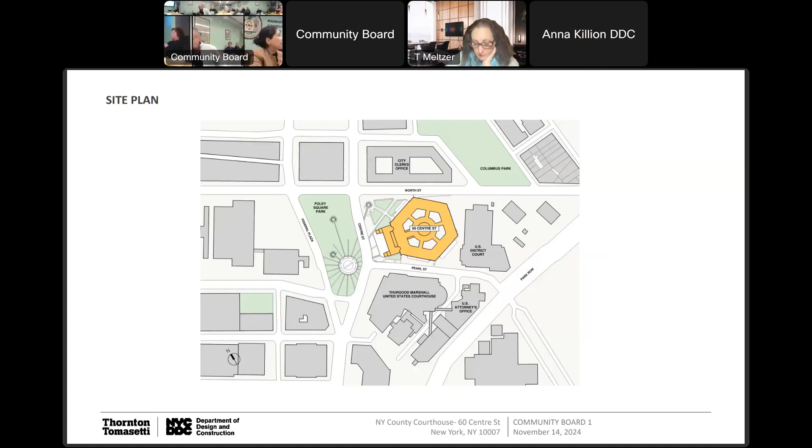So 60 Centre is located in Lower Manhattan between Pearl Street and Worth Street, right across Foley Square. It hosts the New York State Supreme Court and County Clerk's office. It is the courthouse, and the site is part of the 1997 Foley Square reconstruction, which includes the solar ray pavement emanating from the plaza into the sidewalks, including 60 Centre. You can see in green the rays that emanate toward 60 Centre. The design also includes bronze medallions. The 60 Centre property actually has 4 of these rays and one of the bronze medallions.

Next. So here you have the existing site plan, and this project is a little different because it will be reviewed by multiple parties. The majority of the scope of work falls under Landmarks Preservation Commission, because the site is historic, as well as the building, so anything within the property line is under their jurisdiction. Outside the property line, because you have artwork, the solar rays and the medallion, that falls under PDC, the Public Design Commission jurisdiction. You also have New York Parks because of the northeast corner of the property overseen by them, so we had them review and have comments, which are reflected in this submission.

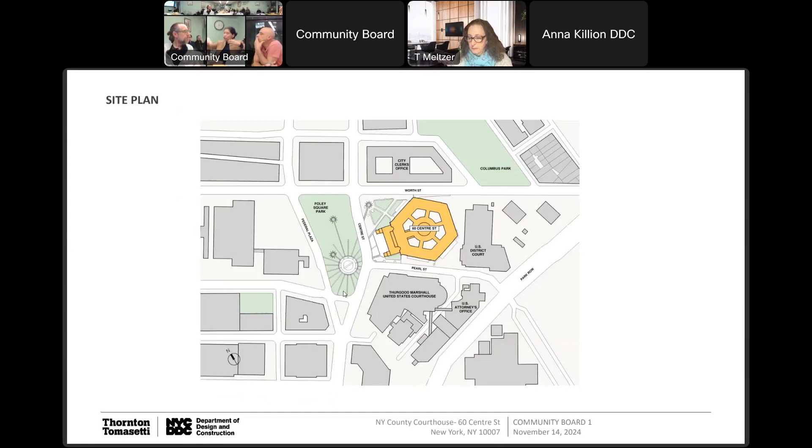What part of this site is historic? Going back here, if you go to slide 2- Foley Square was redesigned back in 1997, and you do have these rays that emanate from the sculpture of Foley Square. They actually reach multiple sidewalks across the site. So that's considered artwork, and because it's artwork, it falls under PDC jurisdiction.

Also, because it's on the public right of way, the sidewalk, therefore everything has to be reviewed by PDC and also the community, because it cannot be changed. Or if there are changes, which I'm proposing a slight change, it has to be reviewed.

Okay, so going back to the project: the project is focusing on a complete envelope rehabilitation of 60 Centre to address causes of water infiltration, drainage, and overall deterioration of facades.

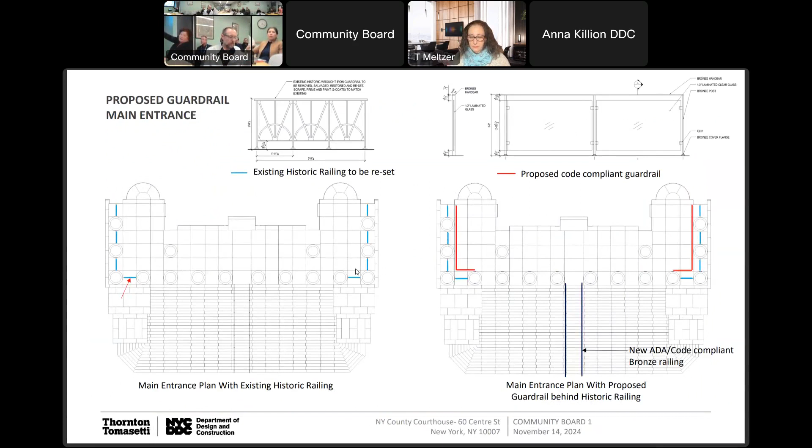The existing is just aluminum on this side. The bottom part is actually the main plan, it's steel pipe railing. The bottom part on both sides fell apart. The top is aluminum.

This is an existing photo. Yes, the left one is actually superimposing our guardrail. It's not going to be much higher. In the middle it's also trying to show there is a guardrail there, from far away, and then we also did a mock-up with the red PVC pipe. That is minimally visible, but it is visible, it blends in.

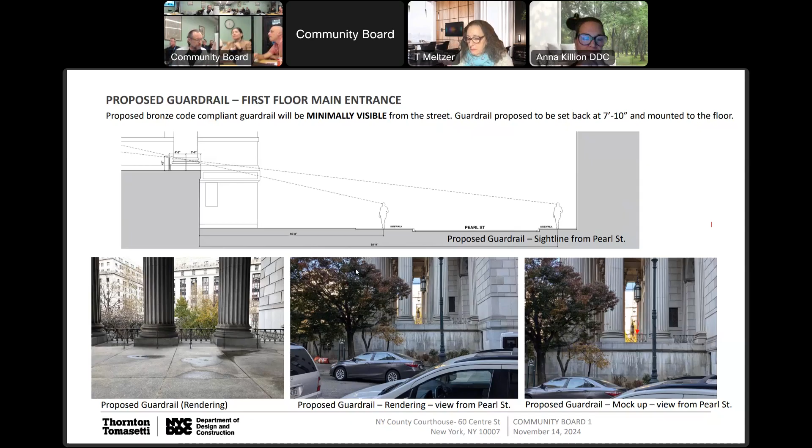So you have the sight lines there. The other change is replacing the roofs at the courthouse. This roof that faces the street does have an existing railing that is minimally visible, and this railing is not code compliant. Once I change the roof, everything needs to be code compliant for safety.

So what we are proposing is actually a very similar railing, but it's taller, so therefore it will be more visible because it's a little taller. On the left is the existing, on the right is the proposed railing for that location.

This is done for worker safety, yes, OSHA compliant. This setback is not used by the public, only for workers, so because it's an OSHA requirement, it makes it hard for us to say all the heights are exceeding. You're doing an excellent job, let's keep going, this is great.

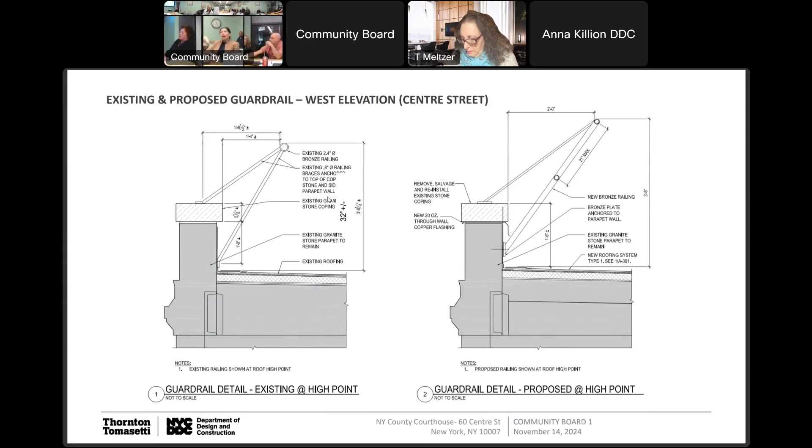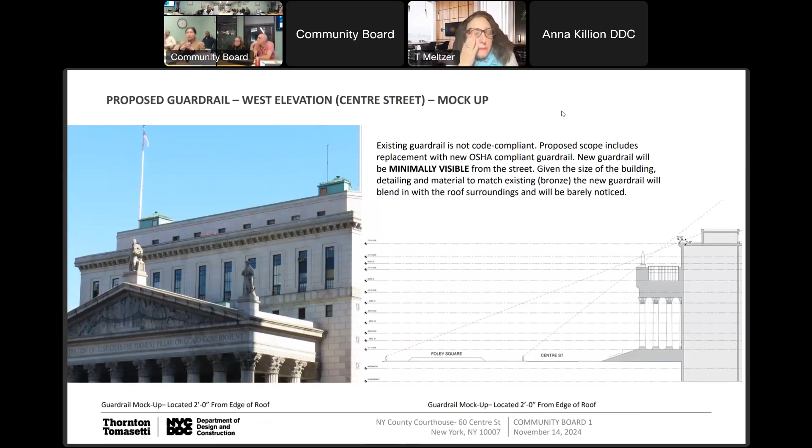The next slide shows our mock-up in red on the left, the sight line. It is about 10 inches higher than the existing one. The next one shows you a rendering of superimposing on this photo, and then the actual railing, the rendering of the railing.

So that's the other change we are proposing here. The repairs at the facades are all going to be done in kind. So we see the Dutchman's, grout injection, the top section is terracotta, so there will be patches and in-kind replacement.

There's another change we are doing at Worth Street. The existing photo on the top right is a wood structure with wire, very temporary, but it's been there for years. The main concern here from the client is a lot of people literally just sit on this knee wall, and there's a big drop, more than 12 feet down beyond.

Also for safety, this fence is actually very similar to an existing fence on Centre Street. But this one goes a little bit more towards the edge to really discourage people from sitting there or using a skateboard. I've been here on a Sunday and I've seen people even skating here.

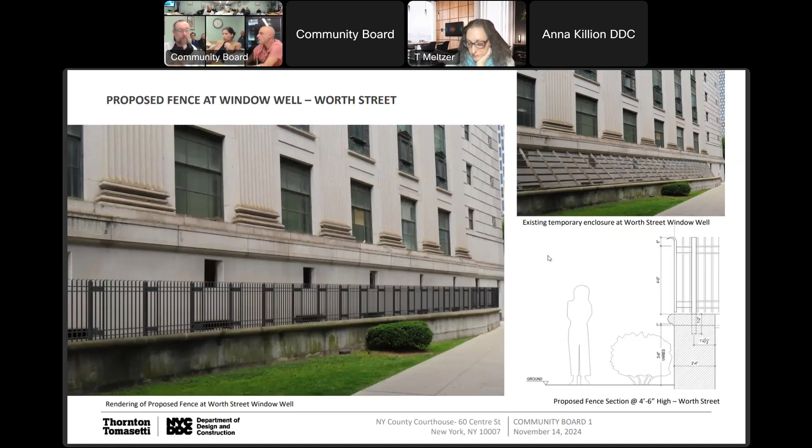So bear in mind that this is superimposing the existing conditions. This whole area is going to be landscaped, with some nice shrubs and trees, so it won't be that visible. But that's what we're proposing, the fence there, very similar to Centre Street. The next slide will show just other changes to the courthouse. This one will not be visible from the street.

So you're redoing the parapets? We are replacing some of the parapets, yes. So why not bring that up to 42? Because then it's more masonry, and you change the aesthetics, but definitely cost is cheaper for railing. But also landmarks usually does not like when we change proportions of a building.

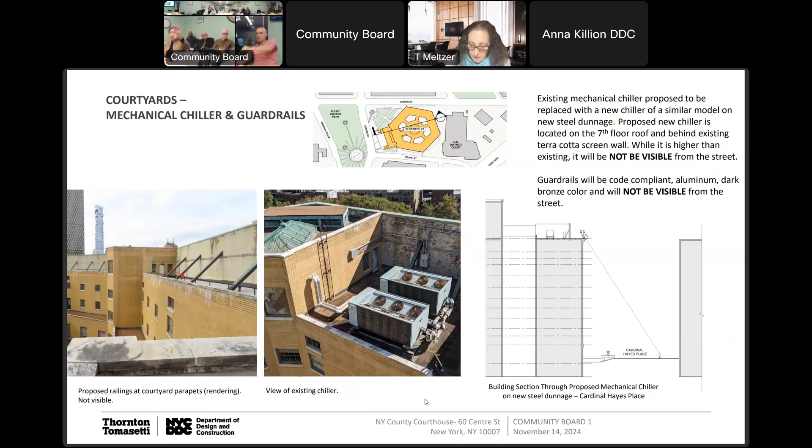It's just unfortunate, all this pipe handrail, I've been seeing it everywhere. Yeah, it's not that visible. Well, it's not visible, right? This one is not visible from the street at all. Great, so really there's nothing for us to say about it.

Oh good, okay. So in the existing... I'm sorry, the site plan, I mean, hold on. There you go. Okay, go.

Okay, so regarding the site, this is the existing site. The idea here is that when we get to the exterior, we will be doing replacement in kind. The reason we are also upgrading and repairing the site is we are doing excavation around the perimeter of the courthouse because of leaks into the sub-basement. So we do need to replace the waterproofing there.

Once we are done, we will be replacing the sidewalks in kind, as well as the solar rays and everything in the same location, with the same finishes. The only change there is the regrading so that it's accessible.

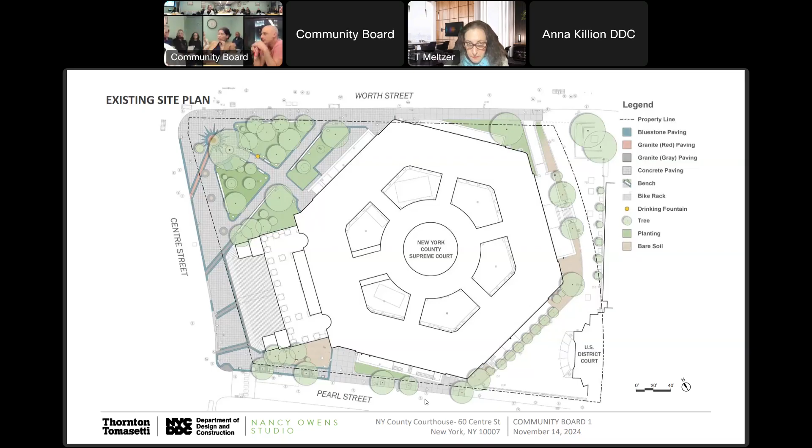The changes, if you go to the next slide, I'll show you a little bit. So regarding the actual concrete sidewalk, we are proposing changes to the direction and the size of the scoring. Currently you have a 2x2 scoring, and we are proposing a 5x5. There's another slide, but let me go over all these changes.

Also, we are proposing to have a post and chain fence around these plantings. Currently there is nothing, so people really just go over the plantings. This will minimize that. The third change is there are tree pits that no longer have trees.

But they are actually affecting the artwork, so we are proposing to realign and adjust them. I will show that on a separate slide.

Another change here is to add spaces in these benches. There are plenty of benches on this plaza, but there's no companion seating. So when we reset the benches, we will be relocating them so that there is companion seating for ADA compliance there. If you go to the next slide, I have a question.

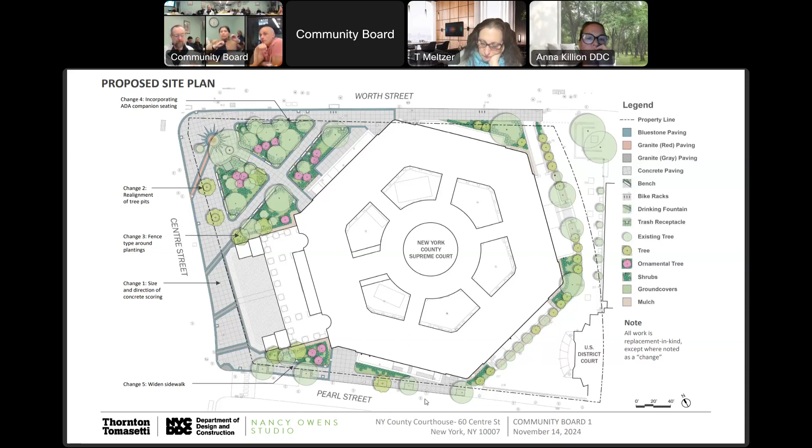Any of these areas that you just described, are any of them original? Meaning any of these tree pits, from 1920 or whatever you said, or is all this landscaping? This was all done - my understanding is this is from the 1997 Foley Square reconstruction. Great, okay, but it is considered part of that reconstruction, so it does fall under PDC.

So from that 1997 reconstruction, we are proposing to change the size and direction of the concrete scoring. On your left is what's currently there, the top photo on your right - a 2x2 scoring with a diagonal, cardinal orientation. We are proposing a 5x5 scoring that aligns and is parallel to the courthouse steps, also along the flow of pedestrians. In my view it would be more elegant and less busy - it's very busy what you currently have.

There is precedence for the 5x5 scoring already on Federal Plaza. Also, Foley Square doesn't have concrete - they have hexagon blocks, so it's different.

The other change - everything else is the same. The solar rays will stay, I'm not proposing any changes there. Really it's the scoring of the concrete and how it runs. The next slide will give you a better idea of what I'm talking about with the tree pits. There are three tree pits that are currently empty - I'm not seeing any tree there.

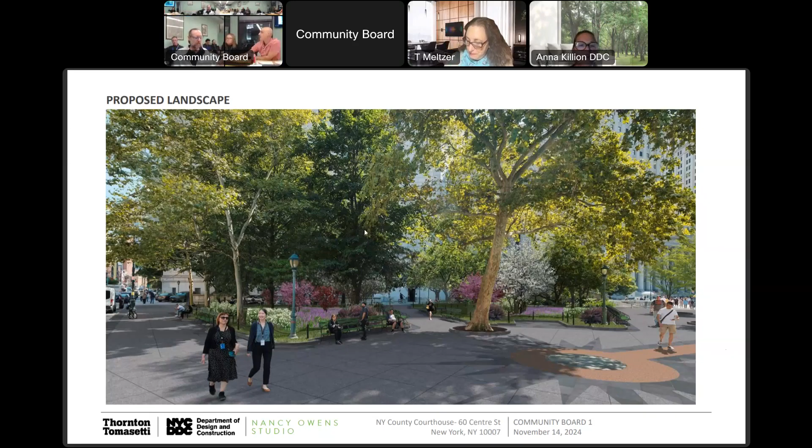I'm so sorry, because I do see hands up, but I want to be fair to everybody who's been waiting patiently with questions. I think there is one more slide, okay. Are there any public bathrooms proposed? No. Can we just get past the slides and then move on to those questions? It doesn't work, now it's gonna work.

So thank you, and my contact is on here if you think of any questions outside of our Q&A right now. But I would please like to allow Tammy Meltzer to ask her question because she's basically had her hand up for quite a while. So please, Tammy, ask your question. Hilarious, considering I'm chair, but yeah. Yes, thank you, Tammy, for your patience.

So thank you, some of my questions were answered. Jason, thank you for clarifying about the net add to the trees. Gerald, thank you for asking about water retention, and I assume permeable pavers are not in the plan because they're not needed where we are. Thank you for asking all that.

My question goes back to the benches, when you're talking about adding companion seating. That adds more space in between, and those benches are fairly tight as they are now. Does that mean you will need to lose a couple benches in order to accommodate the companion seating, or are you just spreading them out farther?

I can get back to you on how many. Let me continue—no, I'm sorry. Can you go forward, I apologize. There's one, that one, sorry. Lucy, now go back. Well, I can't be directed by two people. Give me a minute, ma'am, which slide? Go back one slide. This one, let me see, it has a delay. So another one, it had this delay. Which slide? There we go. I think that one kind of shows a little bit.

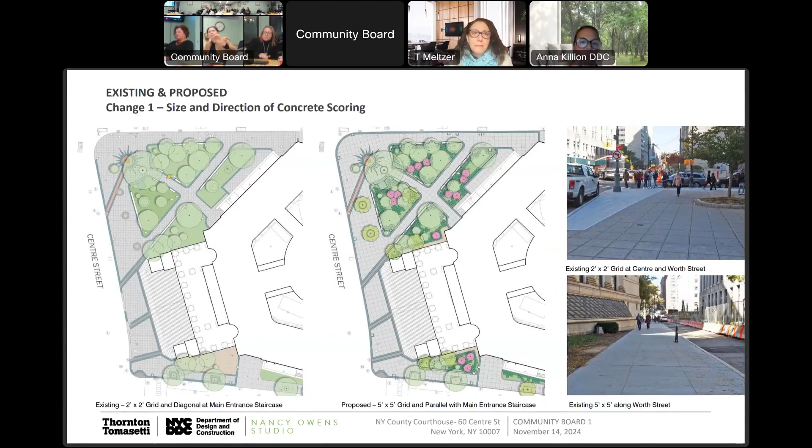So the courthouse, you have a number? This slide is good, we have this. At least I don't have one slide for the actual bench here, but I do have this slide that kind of shows it. It moved. No, because she wants to see the locations. They're right there. Right here? No, right here. Yes, they're right, so over here.

We did have—I can get back to you on the number of benches there. But we did have to open up because they are really on the road. We did have to make these openings of 3 feet, but what we typically did is push them to the side and to the left to be able to make these holes in the middle. But I have to get back to you on the number of benches.

It looked to me, and this is why I was asking, that when you're looking at the center island of planters where you separated them on the left, you would be potentially losing as much as a full bench, if not two. And on the top right side, those are still benches, even though they're not white, correct? They're just shaded green because they're underneath the tree canopy. Correct, that is correct. Then, across from that, the area closer to the building line that has benches in front of it looks like we're losing benches there as well, as many as 2 or 3.

I honestly have to get back to you because these seating companions were a requirement from Parks, and I honestly did not count the number of benches there. I can get back—I'm actually trying to see if my team in the office can count. I will respond to you via email with the answer to your question, so your question cannot be answered tonight.

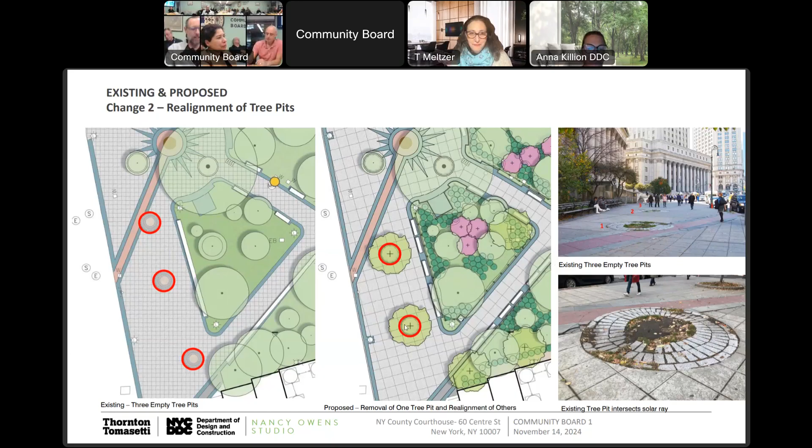I mean, is there anything that, you know, we're doing all this wonderful upgrades, is there anything that can be done? They're not here, is that what you're saying? In this picture, are they here? Yeah, on the barricades, they're temporary. I don't know how long they've been there. We're not gonna dive into that at the 40th minute.

Your first question was about the front, Vicky help me, with the classical architecture, what do you call the pediment? No, the right and the left, the big ones. It's been too long since I've done classical, because I don't see them anymore, I used to see them.

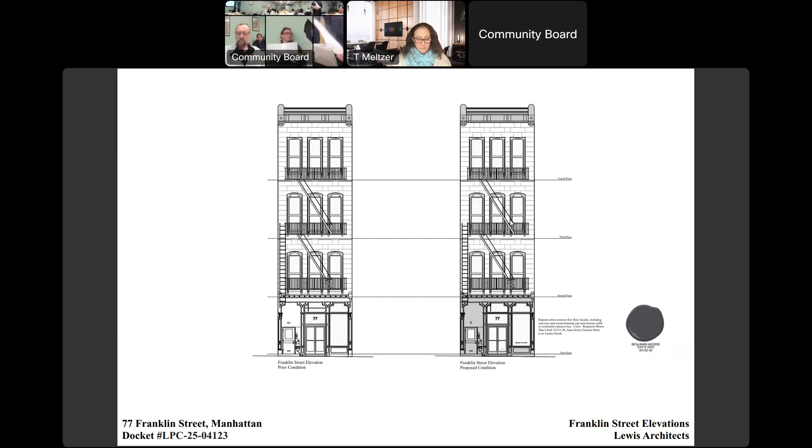So you can see the elevation, the existing cornice is a dark color, and it is also sheet metal, embossed sheet metal with cast iron elements incorporated. So you can see that all we're doing is painting the facade of the storefront. The color sample is off in the corner there. Yes, terrific. Okay, moving on.

These are just historic views of the district, starting with the 1940s tax photo. The building is right in the middle of the image there, and you can see that at that time it had a dark storefront. Moving to the next image, which is super fuzzy but it is what it is - the 1980s tax photo still had a dark storefront.

And then the other images are from the New York Public Library Archive that show various storefronts in what is now the district. What about the designation photograph? It doesn't show it - we weren't able to get the designation photo. So I looked and I asked, but we don't have it yet. Maybe we'll have it in time for the public hearing. They've done a records search for us for a bunch of stuff.

But yeah, your point is that it's been painted dark previously. Correct. And then also historically, if you look at these streetscapes, you can see there's a mix of light colored and dark colored storefront framing, all over the place when we went to the Public Library Archive. Just a fun fact - the lower right image, those little short buildings, that's what became El Teddy in the 80s. That building is still here, which is kind of hilarious to realize when I found that image. Next slide.

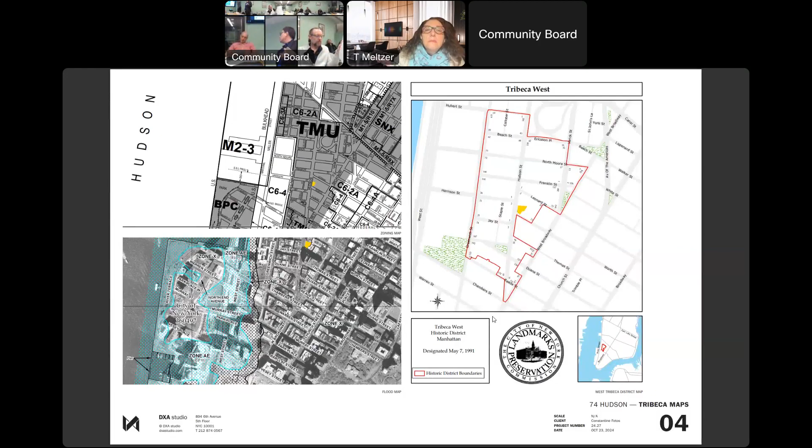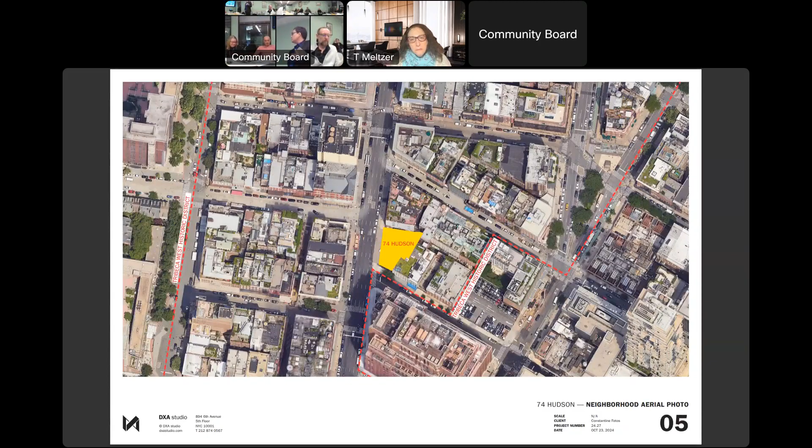If we go to the next slide and zoom in here, you can see we're right north of the Walker Building, whose facade just was restored - the scaffolding came down on that storefront fairly recently. Go to the next slide. So this is our site, you can see we have kind of an oblique angled corner lot.

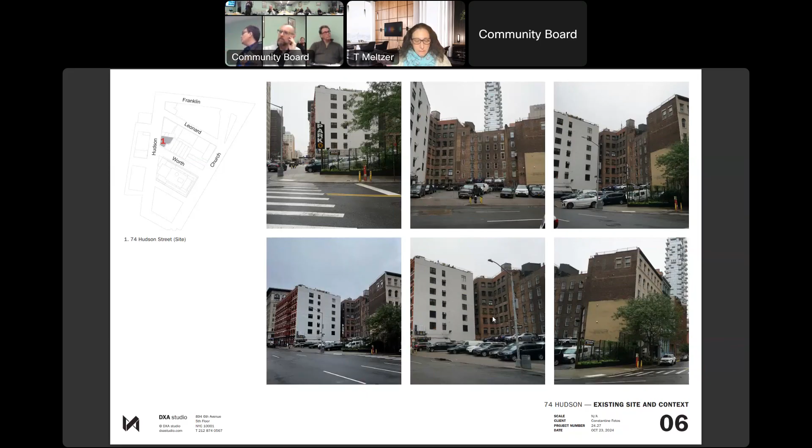These three buildings in front are gonna figure heavily in this presentation because they add a layer of complexity - all three of these buildings in the 80s had the foresight to establish some easements with regard to the height. As of right, we would be a very similar height to this building. I believe you guys have seen this before, probably in 2008 - we had previous approval there, since expired. I can go to the next slide.

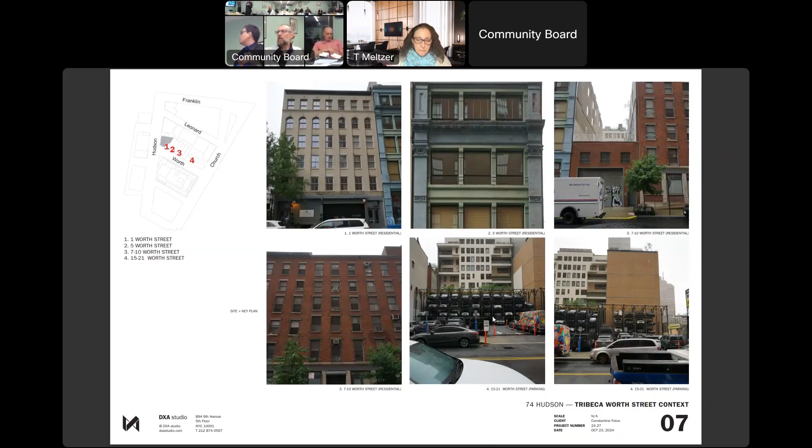So this is marching down the Worth Street side, going top to bottom, walking away from our building. You can see that just outside the district, there's another empty lot with stackers. To the north of us, the rest of the block - give us the next slide. You see a similar kind of large scale, that top left one is directly to the north, it comprises the rest of the block to the north. Then across the street you see that large commercial building, historic, and across from us we have a smaller set of parcels with similar height.

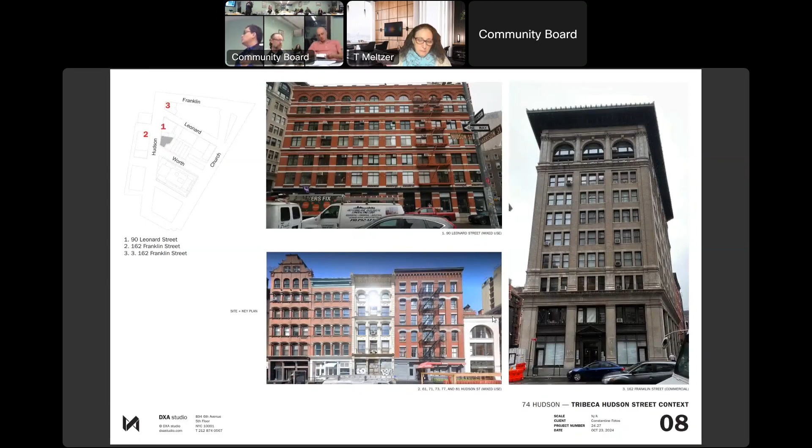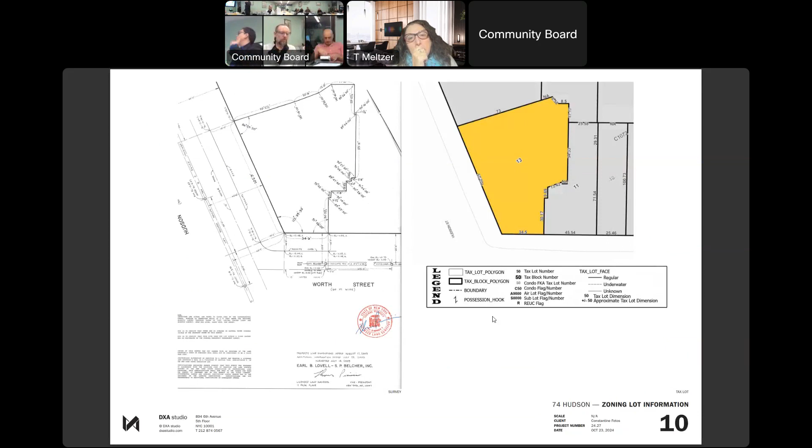If you go to the next slide - we talked at length with Kramer Levin, making sure we understood exactly how these play out. The historic surveys are on the Manhattan datum, but we're going to be NAVD with DOB, and that adjusts it by about 6 inches from the historic point to where the current sidewalk sits.

So which is your current survey that you submitted? The one on the right. This one? Yeah, but in our easements we have to refer to... Where's the surveyor stamp, signature, all that kind of stuff? Well, we have a stamped one now, but this was the most recent one we had. The stamped one will be on our...

Can I ask a question, since we're at a stopping point? Are all of these - is the entire envelope in compliance or conformance with this? Yes, deed restriction - Kramer Levin's interpretation was go as conservative as possible, because at any point if someone challenges you, you're representing that Kramer Levin is your attorney and they've looked at this, and they say that you're designing as per this drawing, anything above that...

Exactly, so if you go to the next slide - no, I'm sorry, wait, you can't go there. This is the historic survey. Yeah, this is the current survey. But like as in one year old? Yes, it was recently stamped, or it was set.

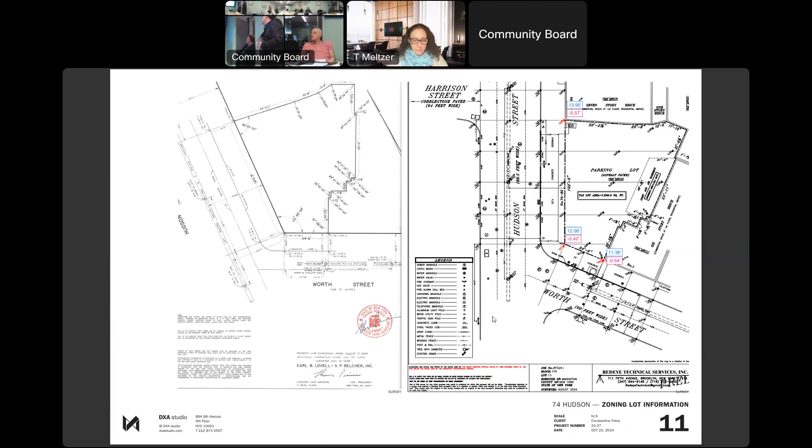But you didn't give us any of that information. We don't know that this is your current survey. That's the problem, right? Because we're trying to compare and sort this out. Okay, I understand now. Next slide.

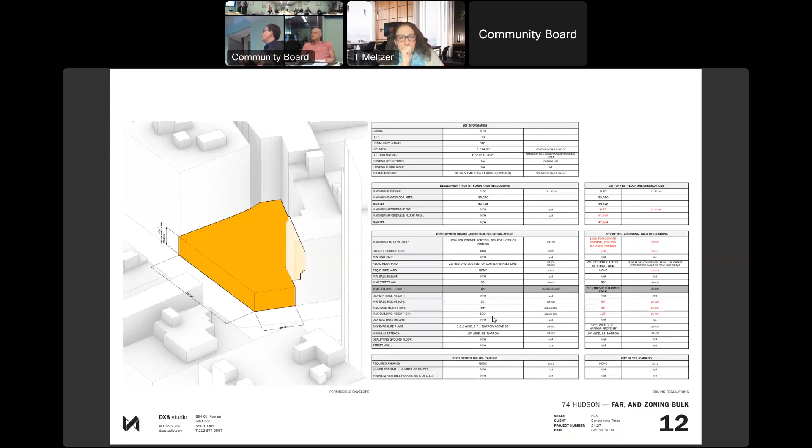So this summarizes all of those easements. Basically our roof plane is allowed to be 18 feet above that curb point. The problem is they're a little more complex than that - each easement was written slightly differently, so we have to summarize them all together. That's what the next slide does. We won't get into it, but the information is there if you go through it.

But this is up on the second floor roof, whatever you call it - that's it, where we're not allowed to put anything like mechanical or a stairwell head. Mechanical, stair, elevator, people park, picnic tables, whatever - public restroom, exactly. But what is allowed past there, according to Kramer Levin, this is your envelope? No, that's not - that's the offset for any mechanical or bulkheads. No, I meant the orange is the envelope.

It's going to be a single story with a mezzanine, about 8 feet - I'm asking you, is this going to be your mechanical, whatever? This is buildable, this is where you can build something, above all, big, right. This is all going to be blank.

Yes, I'm going to have a lot of zoning questions, so we might want to let him get through it. Yeah, I'm sorry, Vicky, what? I didn't mean to interrupt. I'm sorry. Definitely - well, I've spent time studying it today. Yeah, I know, okay.

So Kramer Levin's direction is anything that's an allowable obstruction can go beyond that 18 feet. So that gives us the 42 inch parapet. That's really our only tool to approach this with - our challenge here is to satisfy the appropriateness argument with LPC, as well as be honest to a contemporary building.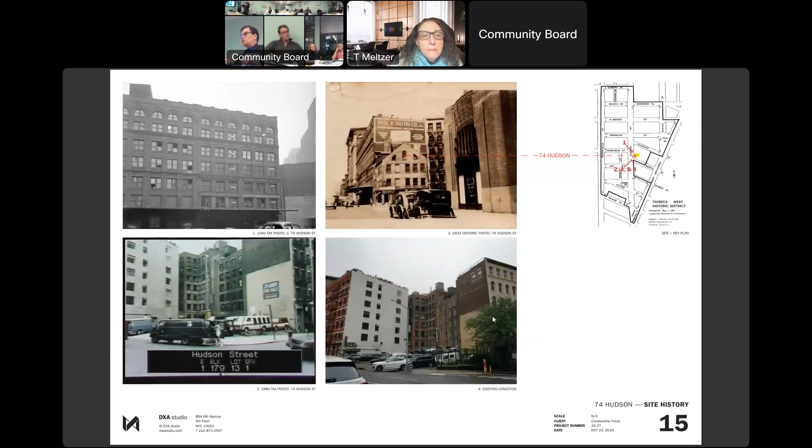I just think it's interesting - the Walker building is outside of our district, but obviously it's a huge part of the context. It's interesting in that it's one of the only nearby single-story buildings, just its storefront, that little annex.

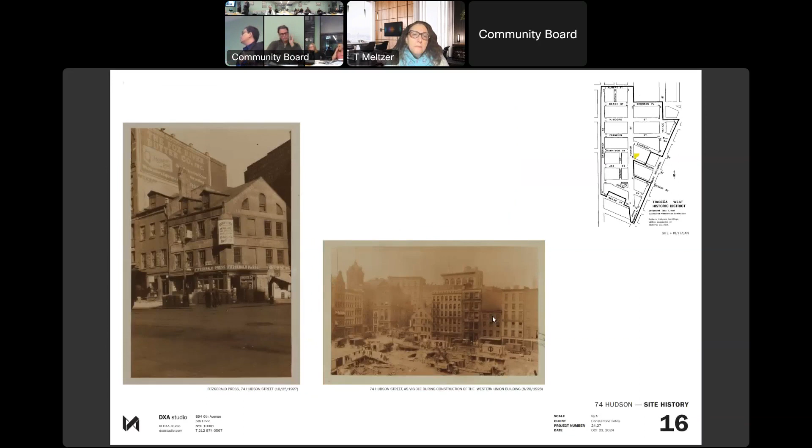These are just more historic photos we thought were relevant, building the history of the place.

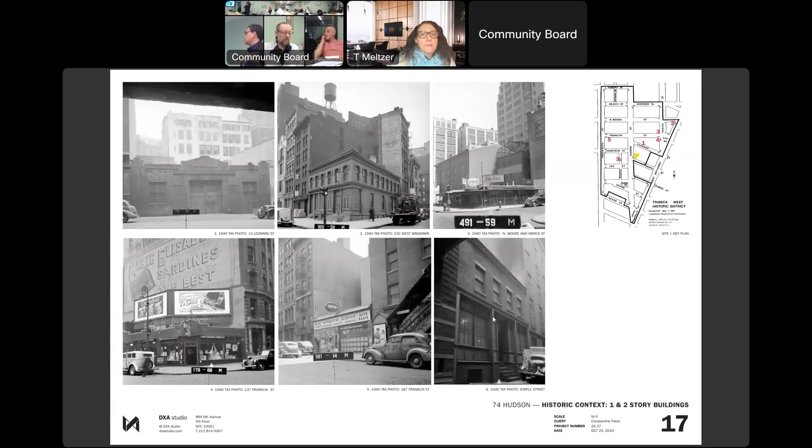So where we started was trying to understand - we went through all the tax photos in the district and found the previous single-story buildings. Basically they're kind of out of character even at this time in terms of the rest of their context. Most of them are just single business occupants.

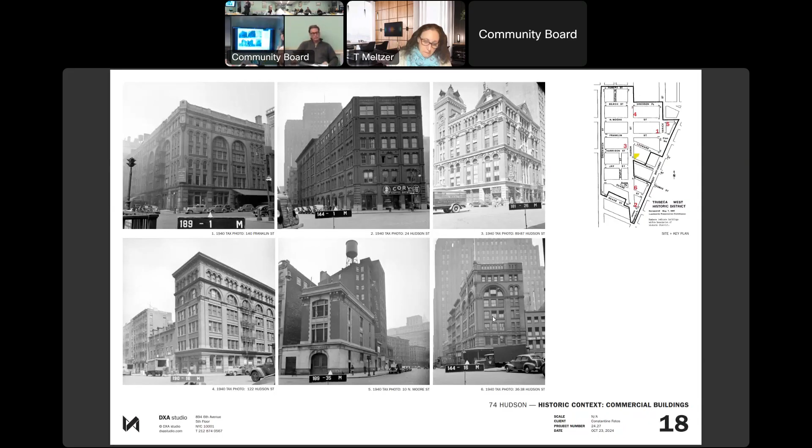Then we looked at the commercial buildings from a historic angle, and this is kind of the character of those particularly corner lots. You can see the arched expression and some of these colonnade, large bays on the ground floor, which figures heavily.

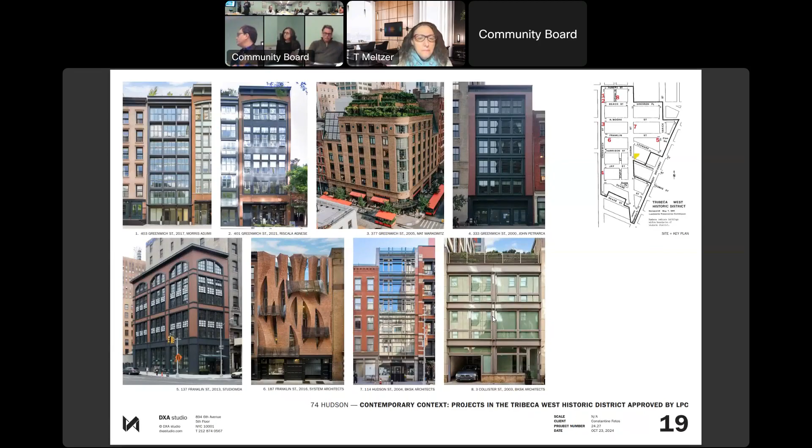This is the same kind of continuation of that - there's some adherence to materiality. There's some writing out there about the facadism of number 4. Recent addition proposed on the right.

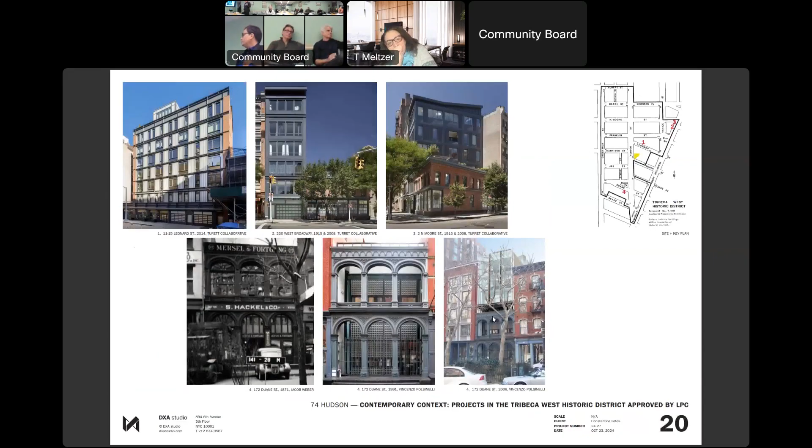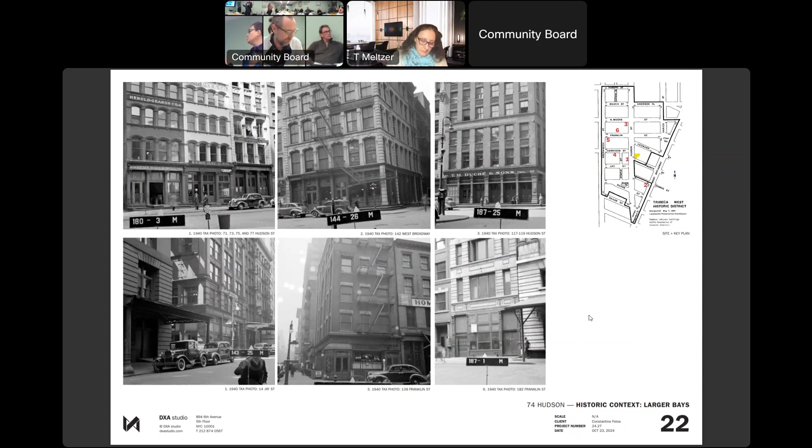So then building our arsenal of expressions here - the larger bays are what we were really interested in, specifically on the ground floor. You see these expressions of a height and a half for those floors, which leads well into our 18-foot dimension.

This is what we see today on the site. I think a lot of it's similar - you've got that clerestory window, or as mentioned, an embossed metal or some of these filigree expressions in that upper portion. I think the top left is really interesting because it's a corner, and we see the scale of repetition of these arcades and the depth of that.

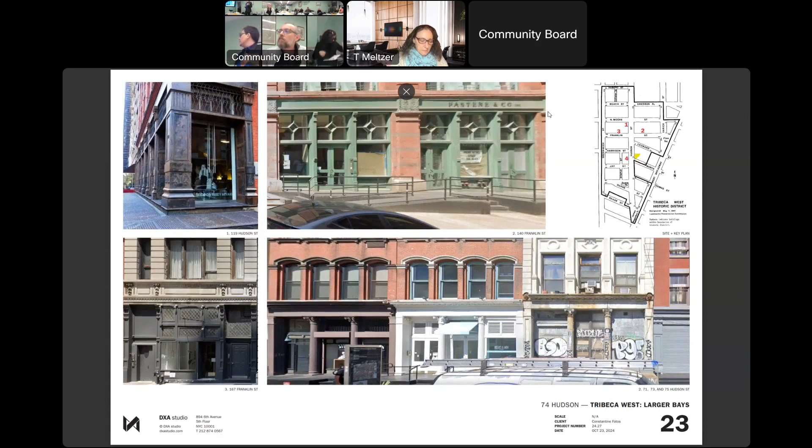It's just more of that thinking - we're looking at the range of materiality and the scale of this expression.

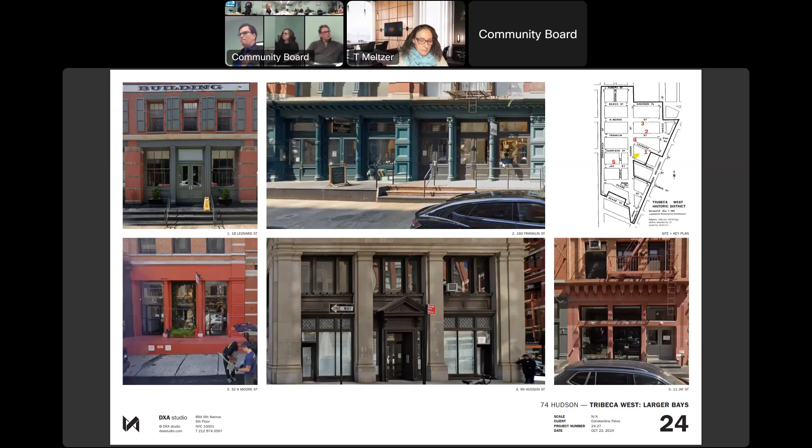It's a long way from what you're proposing. Oh, I know. Okay, oh I know.

Let's keep moving. So then we are also looking at arches, and that's something we're very interested in here, instead of the quiet modernism we were looking at earlier. I think there's a range of these.

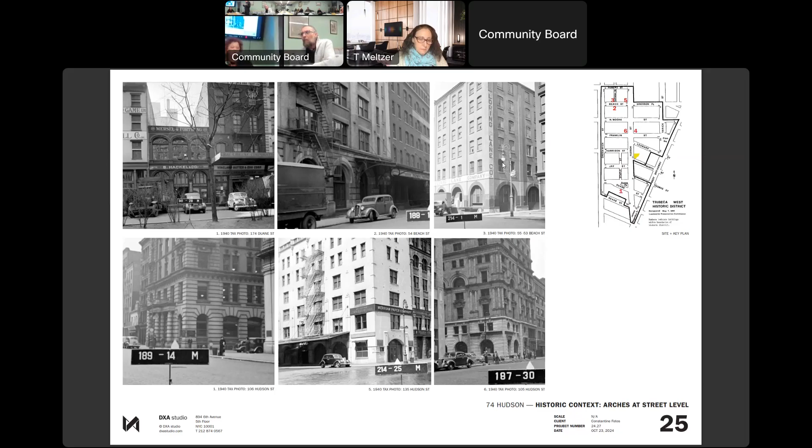They start with a very half round proper radius arch, either a radial masonry expression, or the next slide shows some corbelling of brick.

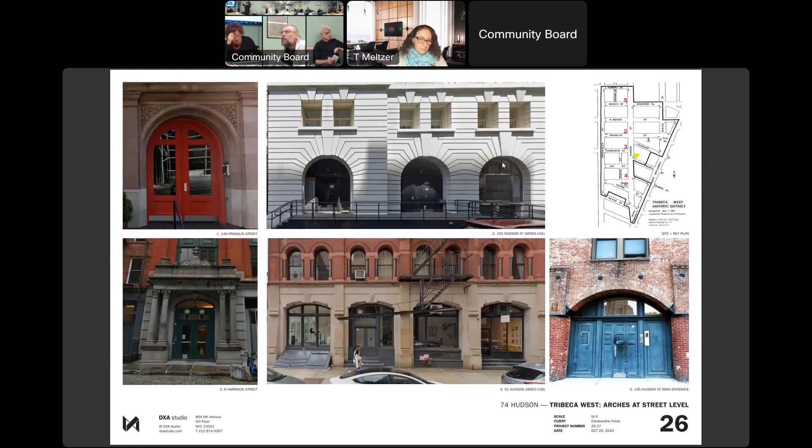But what we're looking at here is the arches - we have a study coming up that looks at how they start to flatten out and become more stylized.

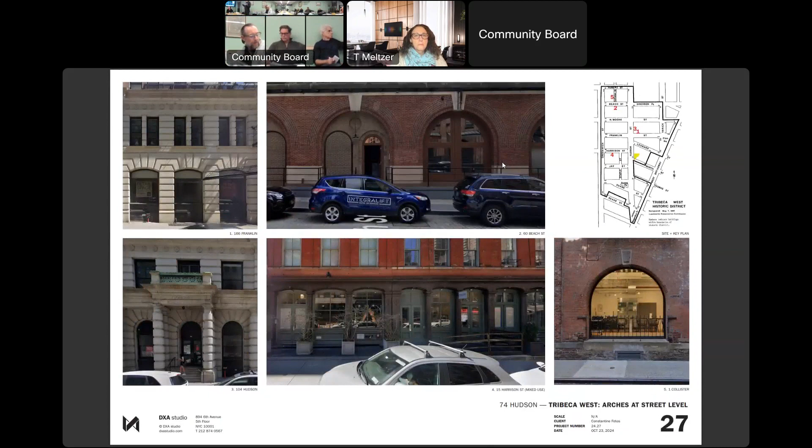This one's also interesting in terms of that repetition, particularly that top middle one with the rowlock brick expression.

So here we were looking at kind of a progression, how the expression of the arches evolved to a more stylized, flatter one - an arc more than a half radius.

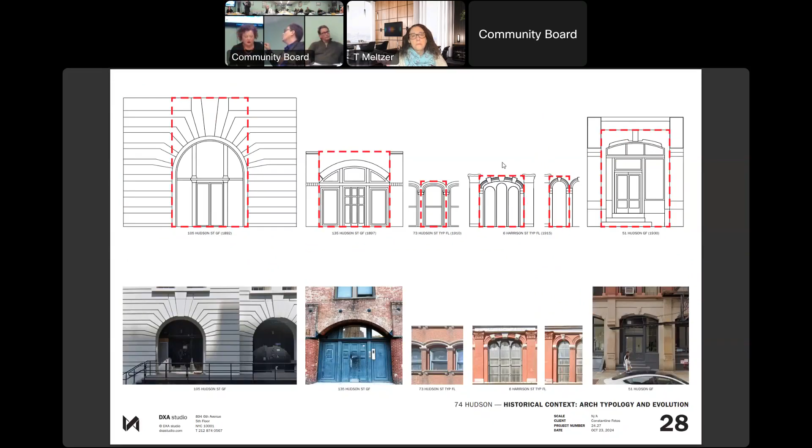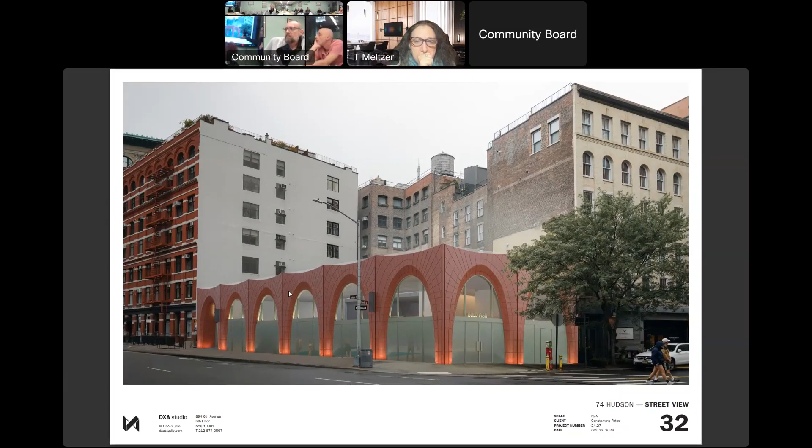And then when we get to that section, it's worth noting that because of that, we have enough height differential to create a commercial second space on the mezzanine. So that's what this entrance to the left is, and that one we're recessing back and trying to create - so the owner has a second tenant.

We'll get to the section. Am I going too fast? I don't know when you...

The blade signs are already rendered. Yeah, and they seem to be compliant - minimal and not invasive and sticking out and screaming. I'm sorry, was there blade signs on the last photo? I couldn't see. Two, black, yeah. Oh, that's - okay, got it.

See them? So we also like to acknowledge that it's a pool. We think the materiality of the terracotta has a relationship to that, and we also like this slight scalloping and this radial kind of droplet of water.

Oh, we have no blue. It's almost comical. Well, I think this one - if you go back to that one - I think this renders really well, I'm just trying to pick up on some of the samples we have here.

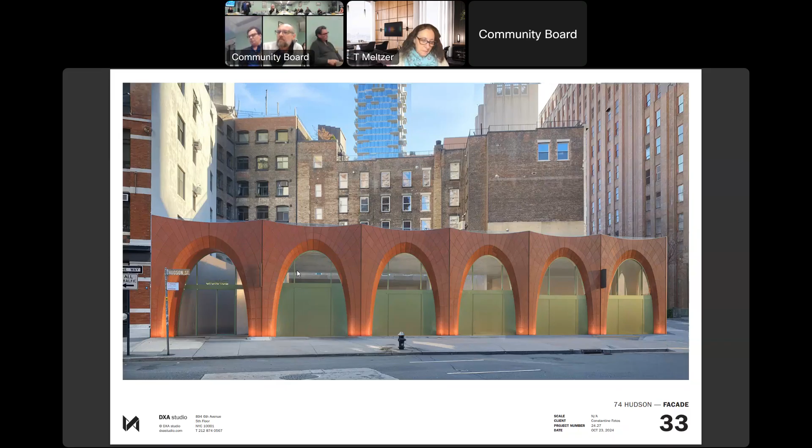Has this been approved at other levels? This is just LPC right now. The first proposal we saw that was approved before, that was not built, not us. So at this point, this is matter of right. One story, matter of right, with all the easements around it and everything. This is all you can get. We're here to discuss the appropriateness, and have more historical slides of the district.

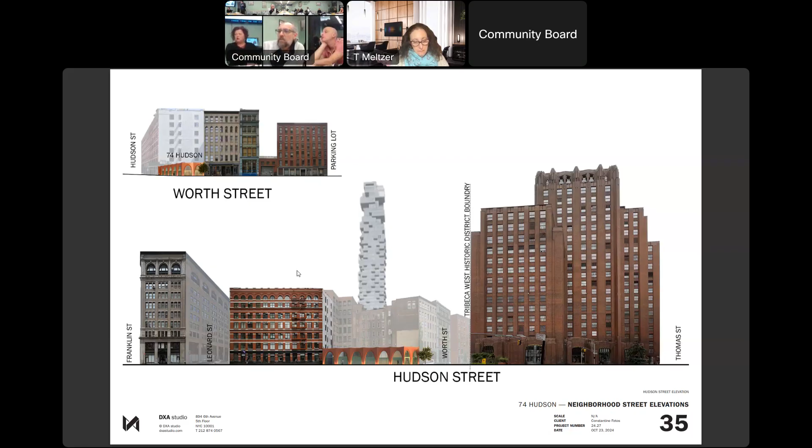Do we need more slides? Yeah, we do. Yeah, we do. All right, just keep going.

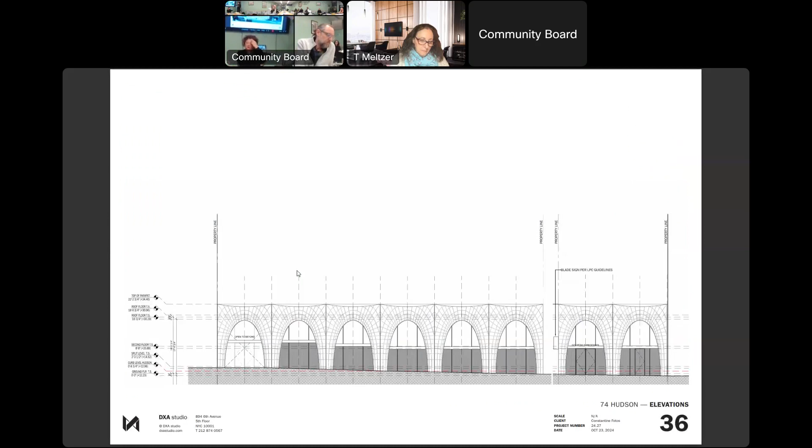So if you go back, this is—oh sorry, yeah. Nope, that's not, no, that's going.

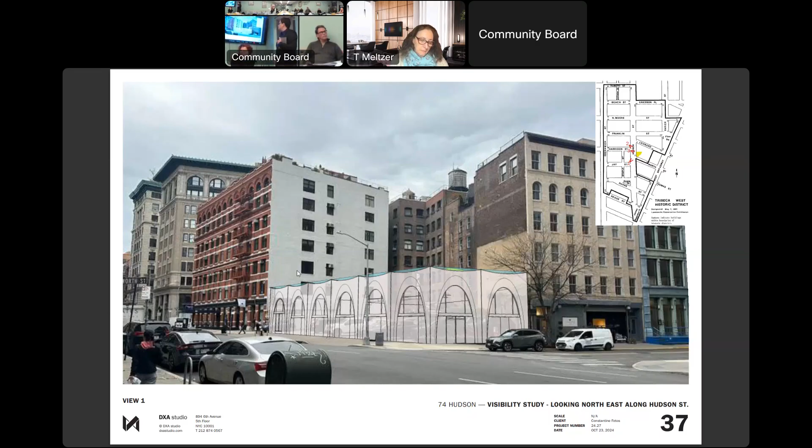So this is a visibility study, simplifying it because it's a little hard to see on the renders, but we have a slight glass rail there. And just beyond that, those represent the most maximally visible kind of bulkheads and mechanical on the roof. We got a package and provided an offset for an acoustic screen, assuming the same motivations behind the easements would want that visually and acoustically screened. This particular visibility angle is for the mezzanine, for the parents watching swimming lessons, and they're not sure they want that elevator, so that might not be there in the end. But right now you can't see the other elevator bulkhead for the commercial space, and you cannot see the mechanical from this angle.

You go one more. And then this is the other, more maximally visible angle. I believe this is the mechanical, right? Yeah. Mechanical equipment. Got it. Where's the mechanical? That's here, right. That yellow area right up here, behind the glass rail. You mean where there's a dip, where it doesn't meet 42 inches? The glass is 42, the dip is less than 42, and where you don't meet it, you put the glass.

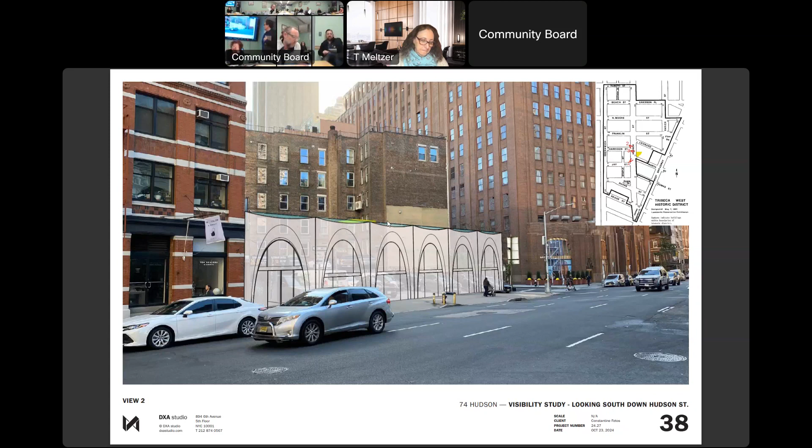So this is just a view from across the street, and from this angle straight on, it's not visible.

And what does the rooftop look like for these people around? Well, yeah, these are the plans, so... I don't know, maybe it's just loading. Let's give it a second. Yeah, we have a very slow connection here.

Okay, but that's interior, yeah. These are all plans. And then the next slide is a section. I don't know if you guys want—does everybody have that? You have that? That's really frozen. Yeah, we might, I stopped it.

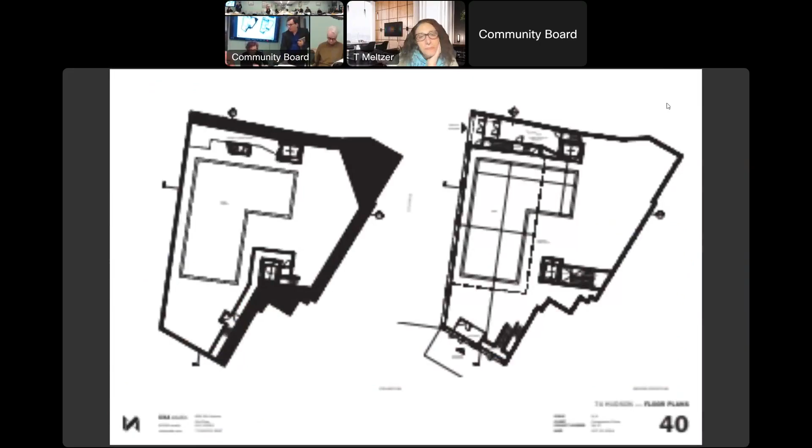This is all the other stuff. The pool that we're interested in is right here. What happens in this space here? That's mechanical and crawl space. But we did skip a page here.

There were two sheets of plans. The one that we missed has the roof. Yes, so basically you can see these guys here, the two in the middle, are forefront of that. No, it has nothing to do with that, it has to do with you being supposed to stay back of all this, right?

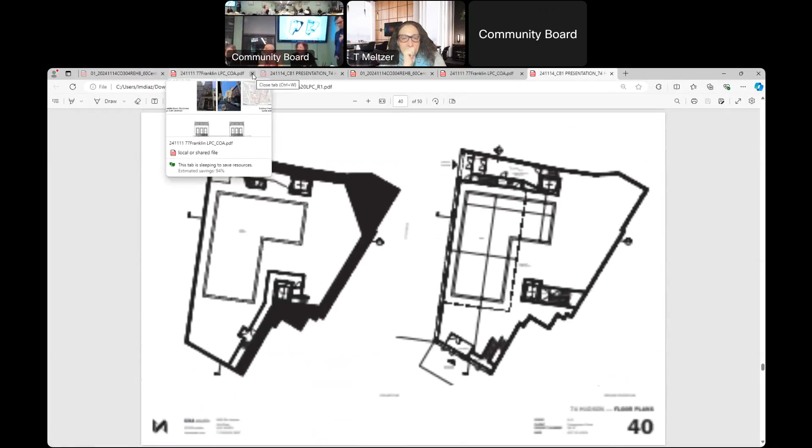It doesn't matter, we can see it, and plus we've got the documents. Right, and honestly these plans, because of the core and shell, they're pretty sparse. I mean you can see the cores, you can see the egress, you can see the vestibules. But this is about the envelope anyway, right?

You have a hand up from the public. Oh, we're gonna do the roof, haven't gotten there yet. We're gonna do the table first, is that okay? Guys, yes, that's anyone in the public wanna ask. Okay, we haven't finished our own questions. Yeah, let's just keep going if you wanna say a couple more things.

Okay, what is this? I've been looking at that. That's the terrace for the commercial space, to get light. And the second... oh, so you just carved that out.

Yeah, like the sign, they're not listening. So, you know, who's been not listening? Then he says, wait for the presentation.

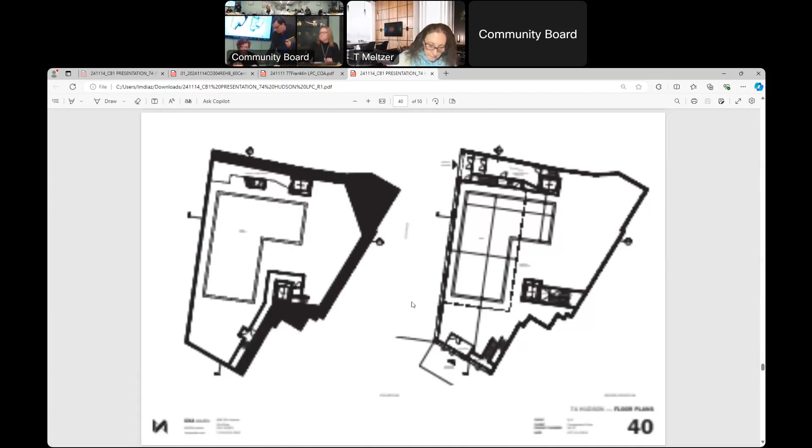We got it, yeah you got it? Yeah, I don't think there's any discrepancies as to what you're proposing. I think it's very clear for me. But did we discuss it earlier with some of the questions?

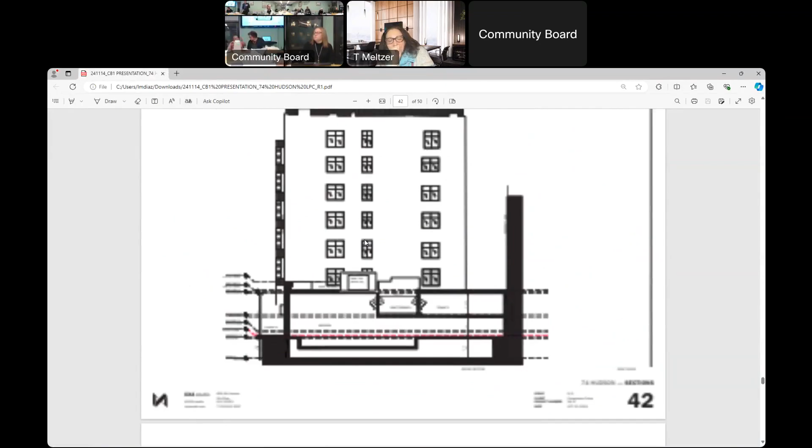No, I haven't, nothing yet. So if this gentleman's done, I think he's okay. What else is left is examples of terracotta, and we know that's richly appointed on the buildings in our district.

Okay, so why don't we do our co-chair here first. I just wanted to verify from you that the current survey and the old survey actually match, that everything was transferred correctly from the surveys over here so that all these perimeter walls looking into this new proposed building are compliant. Yeah, and you have spoken to...

Is it okay if we open this up? I want to know why these neighbors are here. Just before that, because we're going to dig into whatever they say, someone who couldn't be here from the committee was disappointed with your design, the shape feels wrong. Well, we're going to get to that. Let's hear this first, though.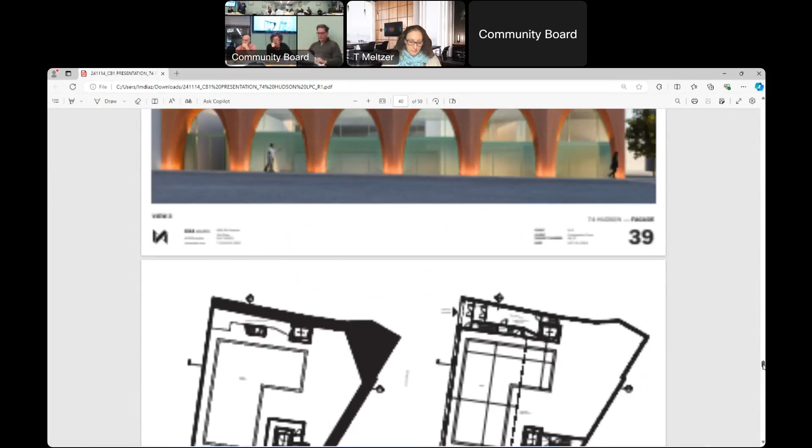The color rendering doesn't really show it well, but they do have some pictures—it's completely blocking the second floor windows. And I'm on the commercial space, and it says here that One Worth is a residential building, but it's only residential from the second floor up. The first floor is mixed use, commercial. I own the commercial shares of the building and have a flower shop there.

On the very first floor, and this would completely obstruct my office windows. If they built all the way up to the wall, there would be no light and air from the windows of my commercial space.

That's easily sorted out in the sense that there are laws and rules based on what you bought, what you owned, how it was done. I'm not a lawyer, but I've done this long enough to know—are your windows that provide natural light and ventilation legal? And in the event that they're closed, that's correct, right? Then that leaves you in a bit of a pickle. Well, it's a landmark—ours is, our building was designed by Stanford White, the facade is landmark.

So this is the rear facade, right? It's on the side facing the park, facing Hudson. Yeah, it's not shown anywhere in any of these materials. They're not showing the windows that they're blocking. So what do you have to say to that?

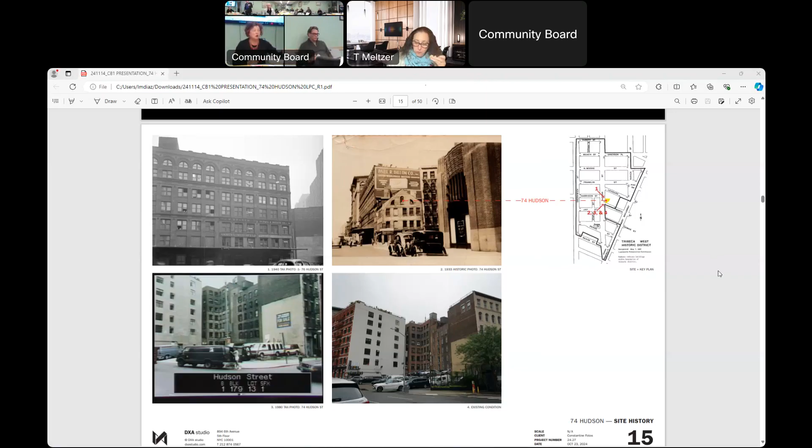and landmarks, historical district, right? So it makes me uncomfortable that you did not speak to the community, that you didn't have any kind of meetings to discuss and review this. Maybe not your job, excuse me, you're the representative here tonight, it would be the owner, right? Because this is New York City and we're a party of all shares, and it's nice to know that, you know, I'm gonna do this and I have the right to build this and then you can have your input. So it's a very uncomfortable situation.

I think we might put that in our resolution. We will also check with Tammy in a minute. Now, as for the look of the building, it is a historic district and you couldn't have gotten any further away from that. So that's a whole other discussion.

I asked if Jerry would like to continue now. Sure, thanks, Vicky. So I have a few questions, I guess. I understand about the light and the air easement. I'm looking at page 13 at this dashed line.

As well as, am I understanding this correctly, that there's a max FAR of 5? Right, and without the easements, and we studied that, because it wasn't clear to us the way the easements are written.